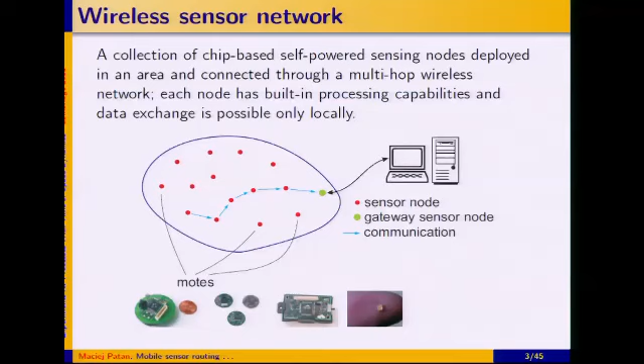According to increasing power of computing systems and developments in networking, and producing low cost, maybe not so powerful, but very low cost electronic devices which are miniaturized, we are able to build extremely complex measurement systems which can provide very rich data, which will be used further in order to produce accurate forecasts of the evolution of the system, or accurate predictions for controlling this system.

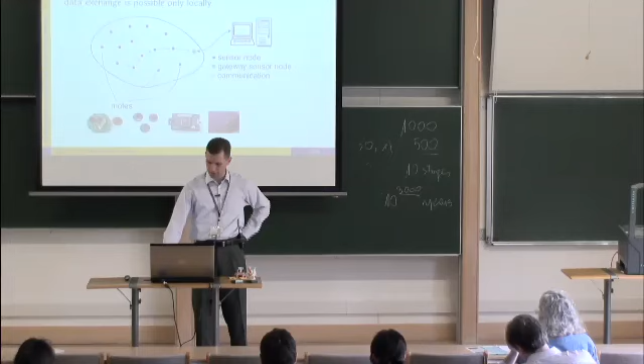Typical operations include sensing, of course, and processing. Every sensor node has a small computational power, so it's able to process the data at least to some extent. Of course, one of the main operations is exchanging data with other sensor nodes, so we have to include the radio subsystem in every sensor node.

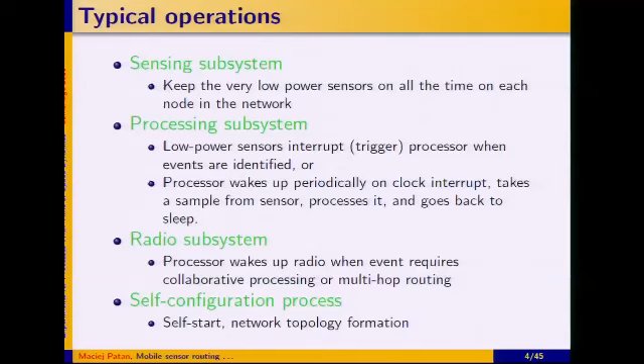Surprisingly, receiving the data and sending the data costs almost the same amount of energy. So from this point of view, usually sensor nodes are sleeping almost all the time and are just doing very scarce measurements. So when we have a swarm of numerous sensors, from the individual point of view, probably the most important thing we have to remember is to spare the energy, because every sensor is usually supplied by a limited battery.

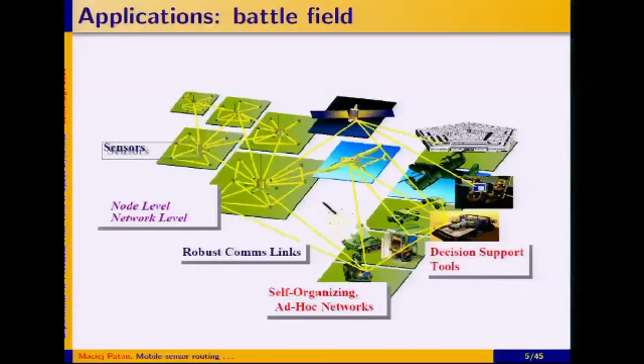Okay, so I'll show you a few applications which are stemming from real-world problems. I'm not trying to show you the same pictures, because these are just examples, but I want to express that these are real-world systems. It's not science fiction. Probably the military applications are very spectacular, but what we are really interested in is

Of course, the main reason for the existence of such an observational system is to control the level of air pollution, because in big cities it's really a big problem nowadays. So in London, in Berlin, rich cities can afford such observational systems, because such monitoring stations are quite complex and expensive devices, and the real challenge is how to utilize this efficiently in order to produce good predictions of the development of the smog, for example. As you observe every day the weather forecasts, you can imagine it's a really difficult and challenging problem.

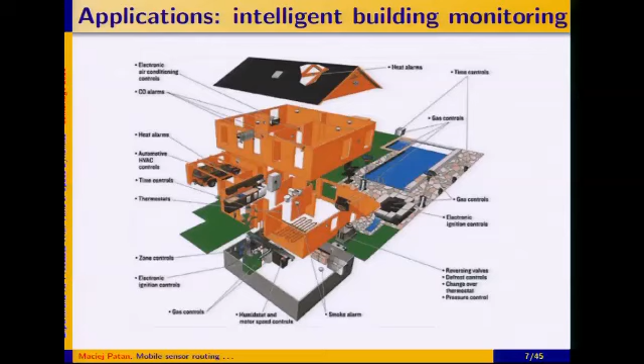Another representative example of application of sensor networks is intelligent building monitoring, in order to spare some energy controlling the evolution of the temperature, for example, and many other things along the building. An extension of this is mobile warehouses, so there is great potential for sensor networks within this area.

If the sensor nodes are conveyed, for example, by autonomous robotic vehicles, often called unmanned ground vehicles or unmanned aerial vehicles, we can say that the sensors have some level of mobility, and are usually called mobile sensors.

I was attending the Decision and Control Conference in Atlanta in December, and the concept of sensor networks has some strange extensions, because there were military applications where a soldier had chemical sensors attached to his uniform, and he was called just a mobile sensor. So it doesn't necessarily have to be robots or autonomous robotic devices.

We can go further, using your mobile phone, which has a lot of sensors included, and you are already within the network. So all of this can be considered as an extension of mobile sensors. It's a pretty funny story, but okay.

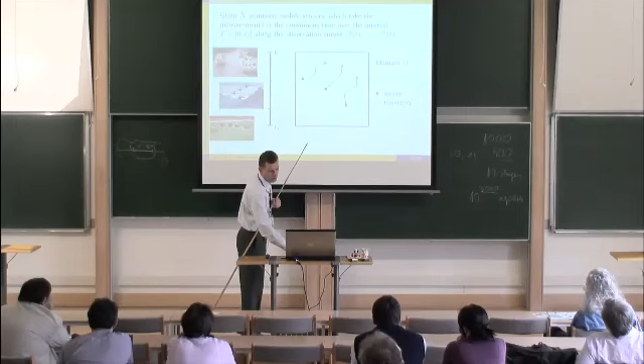What can you obtain with such mobility? We believe that sensors having the ability to move to some areas along the time interval can follow the temporal development of the physical phenomena. So we can go to the areas where something interesting is going on. It's quite intuitive that the sensor should move to areas where, at a given time instant, the measurements will be most informative and provide good data which can be used further for identification of the system, forecasting the phenomena, and so on.

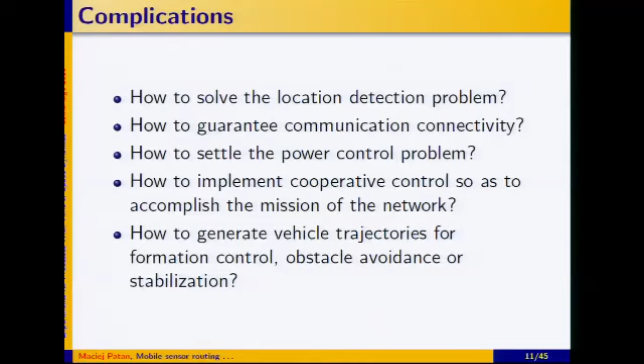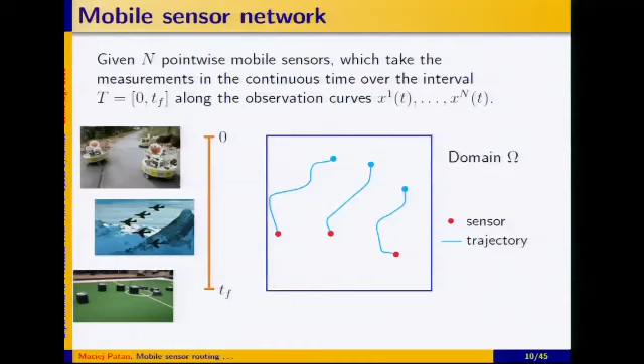It's for sure that mobility requires or introduces great complexity to the problem, so there are a lot of questions which immediately appear. However, we can expect at least that using mobile sensors we can decrease this complexity by using, for example, fewer sensors than in the stationary case. Probably the same effects, the same informative data, can be obtained using just a few mobile sensors instead of 100 or a few hundred stationary sensors. That's why we go for this challenge and look for more systematic approaches related to such moving sensor strategies.

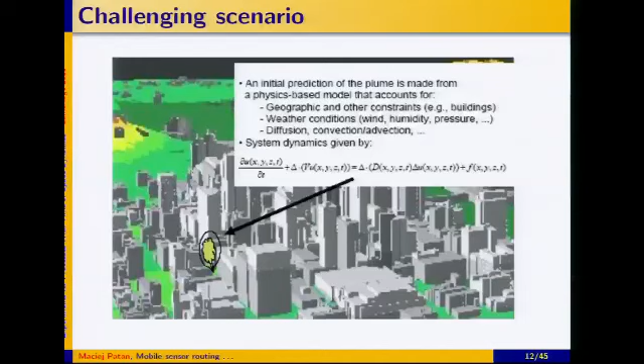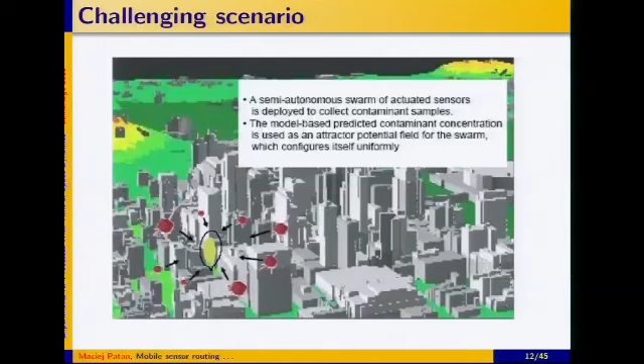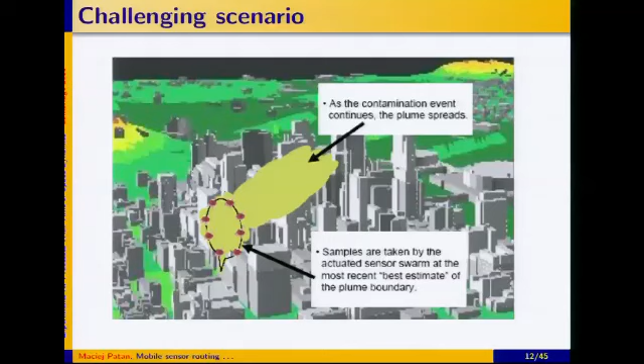A very challenging scenario is the scenario of a chemical attack within an urban area. We start with some activation of a pollution source which develops within time. We try to model this, usually using partial differential equations, for modeling the development of the plume. We deploy a swarm of mobile sensors which have the purpose of monitoring and tracking the pollution boundary. So when the plume develops over time, we try to propose the trajectory of movement for the sensors in order to properly track the contamination area.

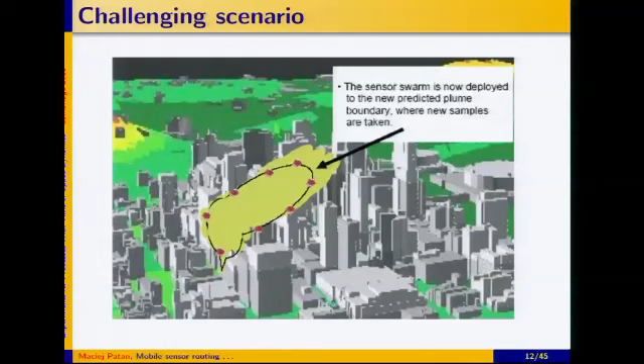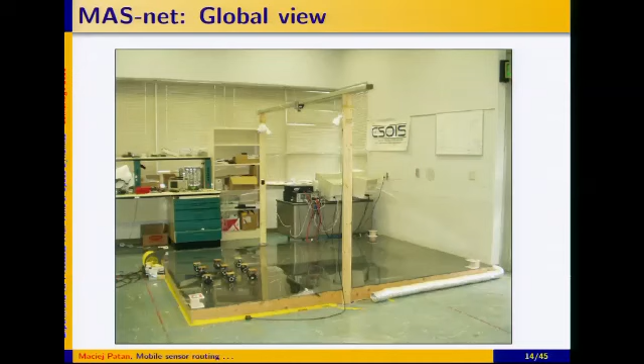To give you a taste of how to test such scenarios in the laboratory, let me introduce a project of our joint co-worker, Professor YangQuan Chen from Utah State University, Logan, Utah. This is a student project. We have a glass cage with walls inside, so we have some kind of labyrinth of rooms. There is a fog machine attached to the cage glass, and we can introduce the fog into the labyrinth of rooms. What we have here is a swarm of 10 mobile robots.

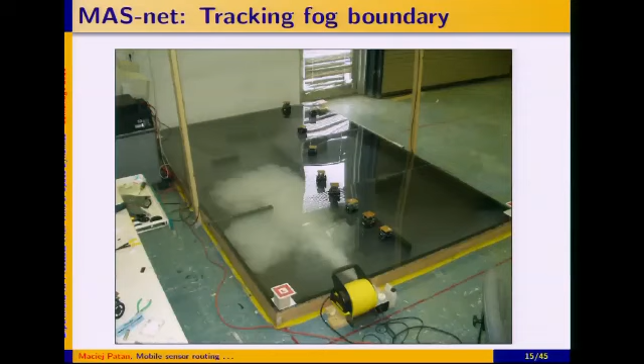Very simple construction. However, they have infrared sensors in order to avoid collisions with the walls, and optical sensors in order to track the boundary of the cloud. Surprisingly, such a simple test bed, because of the micro scale, is even more difficult than the real world case, because we have to model the development of the plume using nonlinear partial differential equations similar to the Navier-Stokes fluid dynamics equation. So it's not easy to approximate the phenomena at such a small scale.

What makes the solution really hard is, for sure, the complex mathematical models which have to be applied. Usually the process is described using partial differential equations, and I have to express that it's not by our choice, because we are not really looking for complexity. Being an engineer, I'm always looking for a simple model which can approximate the real phenomena with good accuracy. But believe me, in many industrial applications, only partial differential equations give you the level of accuracy needed to control the process. That's why we have to go for such complex, sophisticated mathematical models.

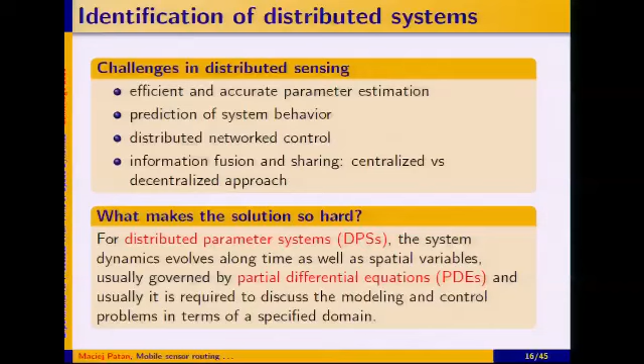But we obtain, potentially, the ability to approximate the real phenomena with very good accuracy.

So I'm going back to the pollution source identification problem, which will be the example we are interested in. The problem, of course, consists in designing the trajectories of sensor movements in order to provide the most informative data for the purpose of, for example, quick and reliable detection of the presence of such a pollution source or sources. And of course, after detecting the source, we have to localize it accurately, and so on.

Quickly, we can go for an even more challenging problem. If the source is also moving and its trajectory is unknown, the question is how to reconstruct such a trajectory. It's probably easy to see that this second problem is far more extremely difficult than the first.

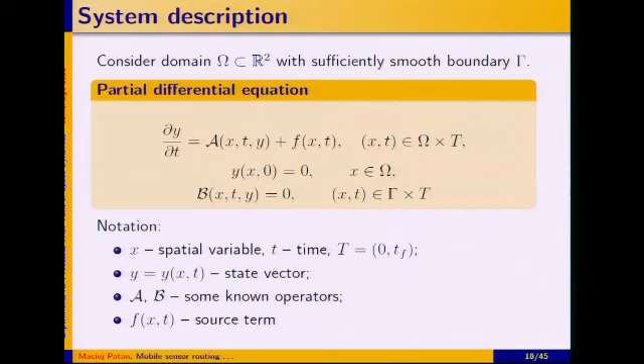Okay, Dariusz has already presented the general description of the class of considered systems using sets of partial differential equations, supplemented with some suitable initial and boundary conditions.

The difference, the slightly different form of the presented model is that there is a directly written term which is responsible in this case for the modeling of the pollution source.

In the literature, different models are considered. However, due to some numerical reasons and due to the flexibility of the modeling, here we have the model, which is a continuous approximation of the pointwise pollution source, most commonly used in modeling in the literature.

So in such continuous approximation of the pointwise source, we have separate terms responsible for the intensity, dependent on the set of parameters rho, and spatial distribution of the source, dependent on the set of parameters b.

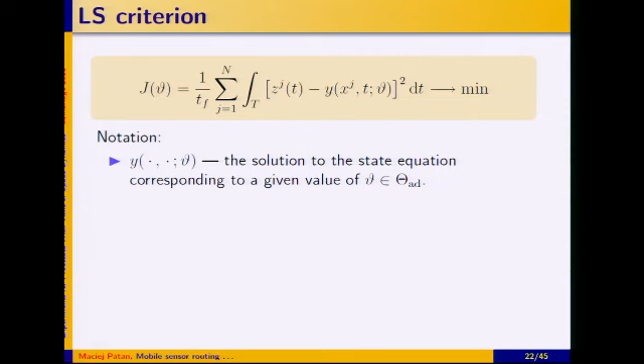A typical approach is to use the least squares criterion in order to estimate the vector of parameters theta, the vector of system parameters.

Very roughly, we can start with the formulation of our problem in terms of how to determine the trajectories for the sensor nodes so as to maximize the estimation accuracy.

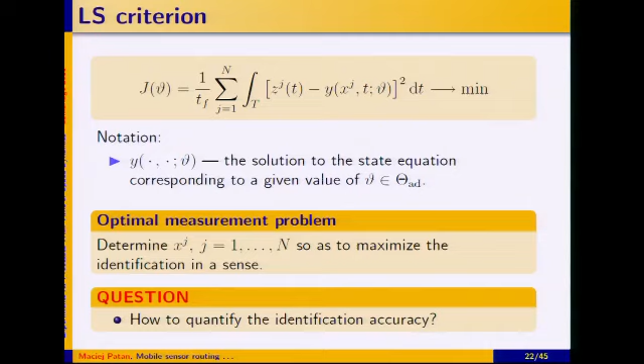A reasonable approach within the mainstream of methods originating from experimental design theory is to use as such a measure the Fisher information matrix. It has almost the same form from the notational point of view—there is no crucial difference compared to the Fisher information matrix presented by Dariusz in the previous talk.

However, here, instead of sensor position, we have the whole trajectory of the sensor node.

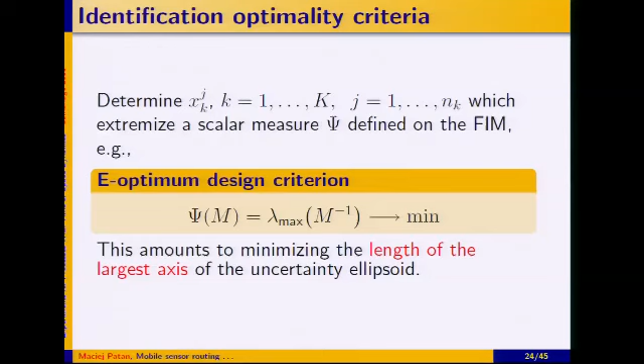As usual, this is familiar for almost all of you, that we have different strategies of compressing, so as to achieve the proper accuracy. I will skip this in order to spare some time.

When we're talking about robotic vehicles equipped with sensors, it's clear that we have to impose some additional constraints, because there are no robots which have enough power to go with any velocity in any direction. So there are natural constraints which have to be imposed on our problem.

So we have to model the dynamics of sensor movements. Here we have the vector of temporal sensor positions. Introducing such a vector, we can write down an ordinary system of differential equations describing the dependence of the positions of the sensors on some control.

Usually, in the simplest case, we can consider this as, for example, velocities of the robots.

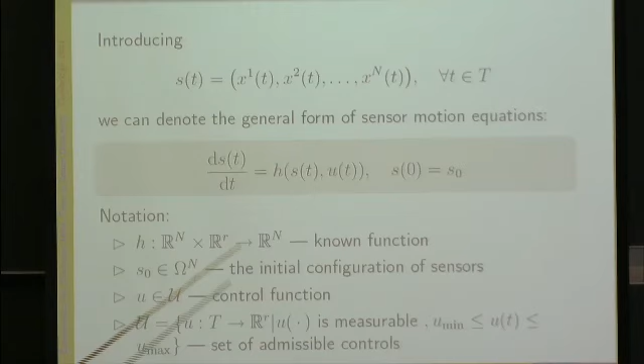Such constraints provide, of course, some level of regularization for the sensor trajectories, because, due to the numerics, we have to assume that the right-hand side is a function differentiable with respect to time, and this introduces some level of regularization for trajectories. So from this point of view, they will not only be measurable, but, for example, continuous.

More formally, we can now describe the optimal sensor guidance problem as looking for the pair of controls for the robots and initial positions of the robots. We can also, to increase the level of optimality, optimize not only controls but also the initial positions.

It is possible to introduce this easily into the problem in order to minimize some scalar measure operating on the Fisher information matrix. Trying to solve such a problem directly, you can imagine it's quite a difficult task. Fortunately, there exists a simple reformulation of the problem.

So introducing a quantity pi, which is nothing else as a Fisher information matrix with the defined observation horizon, we can reformulate the problem in terms of the equivalent linear Mayer optimal control problem. It is now easier to solve.

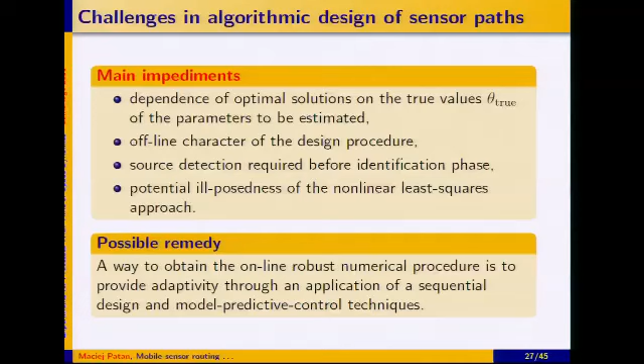A potential solution to overcome those difficulties is to make a combination of well-known techniques known from optimal design theory. For example, naturally we can split the observation interval into sub-intervals and provide a similar procedure to well-known sequential design. So within each interval we will repeat the processes of estimation of the parameters.

And based on those parameters we can design new trajectories within the next time sub-interval.

Another problem related directly to the air pollution is how to reliably detect the source. So when it appears within our system, and how to then localize it with good accuracy.

First, to focus your attention, not all of the parameters of the system can be used in order to, for example, provide a good, proper, accurate detection of the source. So we have to split the vector of system parameters into two parts.

The first part will be composed of the parameters which are useful for building a proper diagnosis, and the rest of the parameters which still have to be estimated but are not significant for our purpose of detection of the source. In such a way, we can formulate the source detection problem.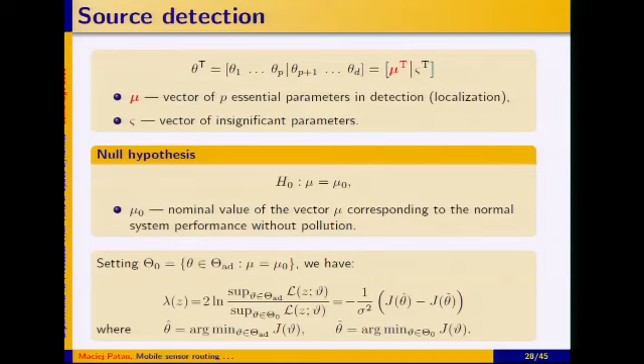So now, even for the problems when we know directly that such a likelihood test is not optimal, we can still utilize this and obtain suboptimal but accurate results.

We also have the very nice theorem by Goodwin and Payne that the log likelihood ratio converges weakly to some variable from the chi-square distribution with p degrees of freedom. This gives us a very simple threshold test.

So in order to detect the source, it is enough to compare the log likelihood test with some significance level taken from the chi-square distribution.

The question is how to maximize the reliability of detection, in terms of the application, how to minimize the probability of missed detection. So where the source is present and we don't want to miss this fact.

The very natural answer, owing to the assumption that the sensor nodes provide independent measurements, it's clear that the more sensor nodes we use, the more reliable data we obtain. But unfortunately, in many practical applications, the number of sensors is limited, so we have to look for some alternative solution.

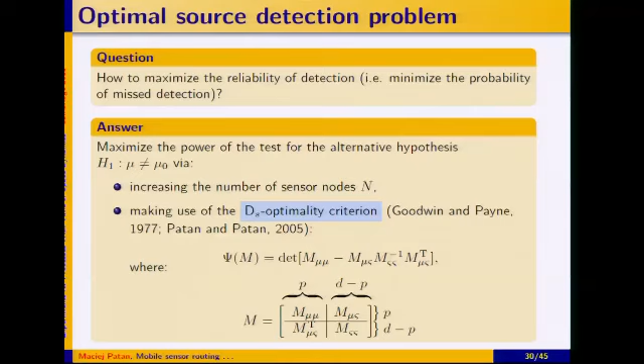So it has been shown that we have to focus on the Schur complement of the Fisher information matrix, related to those parameters which are required for proper detection. And we can use this well-known DS optimality criterion in order to increase the reliability of the diagnosis. And what we've got here is nothing else but the sequential design.

So we split the whole observational interval into many sub-intervals. And for each sub-interval, we alternate the analysis phase, when we try to, based on the current estimate of the parameters, predict the evolution of the system. Then we try to design the trajectories for the next sub-interval. Then we go for the experiment phase, so we collect the data.

And finally, based on the data, we try to use the log likelihood ratio. We want to answer the question if the source is present within our monitored area or not. And then we go to step one and repeat the same procedure for each consecutive time sub-interval. So from the point of view of experimental design, it's nothing else like a sequential design.

The localization block: once the pollutant source is detected, we have to localize it, so we focus on different parameters. The localization block seems almost the same, it's a sequential procedure. However, the difference is that during the localization phase, we focus our attention on different parameters of the system. So in these terms, it's different.

Okay, so I'll go quickly into some numerical examples. Consider identification of the stationary source. So we model the transport chemistry process of the pollutant using advective diffusion equation, supplemented with some boundary and initial conditions.

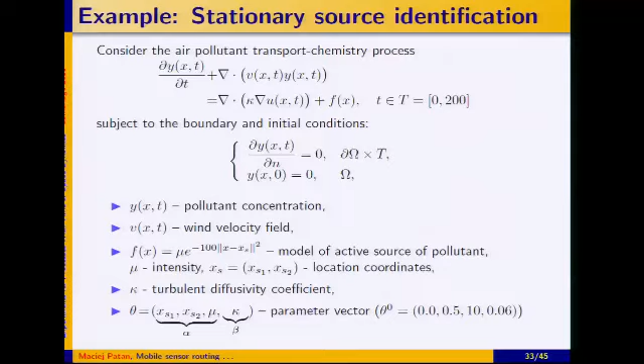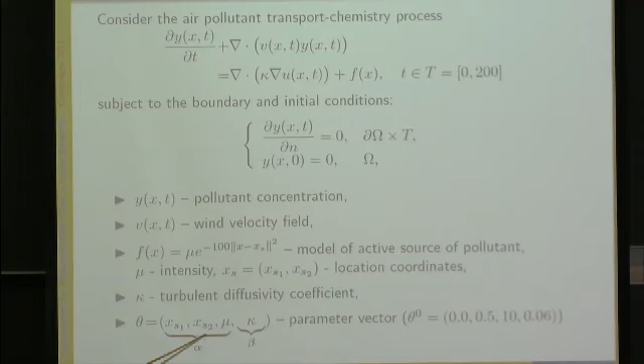Here we use a very simple model, Gaussian, for modeling the active source. What we want to find, because the source is stationary in this case, instead of trajectory, we want to find just a localization: the coordinates of the source location and, of course, the intensity of this source. The parameter which is not interesting from the point of view of source detection is the tensor of turbulent diffusivity. So we want to focus on those three parameters describing the source. Of course, this kappa parameter also has to be estimated, but we are not focusing our main attention on this.

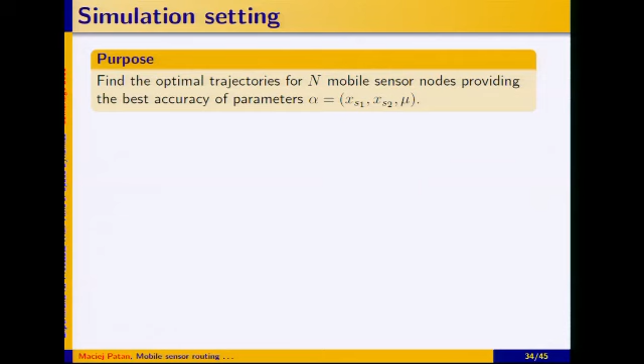So in our simulation setting, the purpose is to design the trajectories; because this is a stationary source, there is no adaptivity at the moment. We want just, in an offline manner, to propose the trajectories for different numbers of sensor nodes, providing the best accuracy of the three parameters describing the source.

For the sake of clarity, a very simple sensor dynamics has been used. We control the velocities, so u is the vector of velocities in two spatial directions. Control constraints: the velocities cannot exceed some maximum speed level.

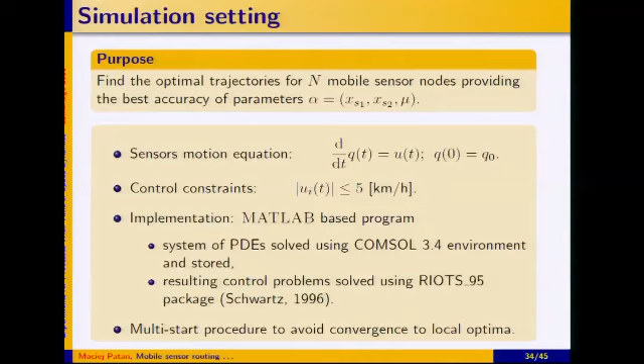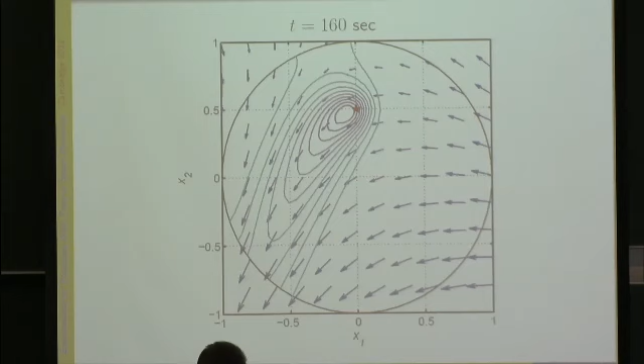So the parameters of the source, its proper location and intensity, are unknown. We have to find how it works, so probably I'll go for the animation. The sensors approach the area from the left boundary, and we can see that after a few hundred seconds, the source is localized in terms that the sensors tend to find the location of the source.

Because of the velocity constraints, the last sensor is not able to reach the area where the source is present. That's why this trajectory is like this. It can be explained in terms that these sensors try to provide information not about the coordinates of the source, but rather on the intensity and the unknown turbulent diffusivity coefficient. We can see the same procedure for 6 sensors.

Trajectories are very similar, owing to the assumption of independent measurements. Probably those 2 sensors in the middle just... So you can have the impression that we can use more and more sensors, and the trajectories will be similar, and just some new sensors will independently follow trajectories which will be more informative in our problem.

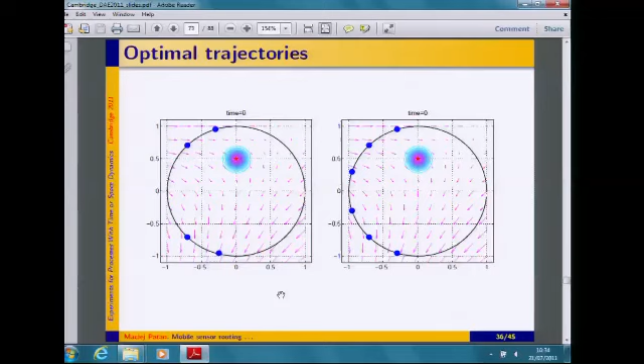However, I have also run experiments with a number of 20 sensors, and there the problem appears that they have to exchange information, so the trajectories differ from the comparison within the 4 and 6 sensor cases. It seems that the differences are very insignificant, but the more sensors we use, the problem becomes more... okay, so I'll go to the next one.

So the last example I will present very briefly. It's more challenging, and here we have the mobile source. The equations look similar.

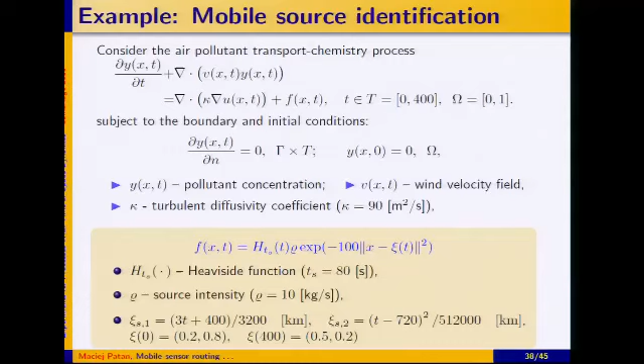This time the source starts emitting the pollutant not at time 0, but at the moment of 80 seconds. The source is moving along a parabolic trajectory, so the process is even more complex than in the previous case. Now we are using only 4 mobile sensors.

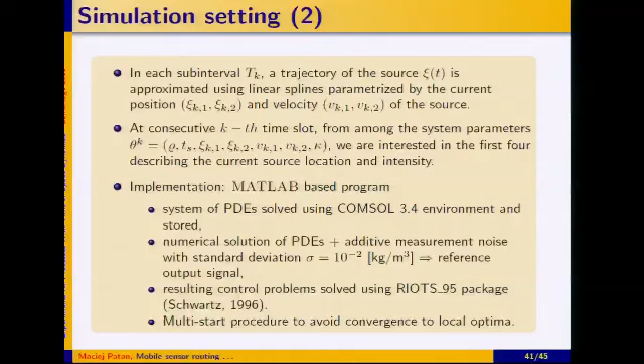Okay, here are the results. At the beginning, the sensors follow some arbitrary trajectories, just going toward the center. When the source appears, some of the sensors which are able to follow it do so, but the last sensor is not able to reach on time.

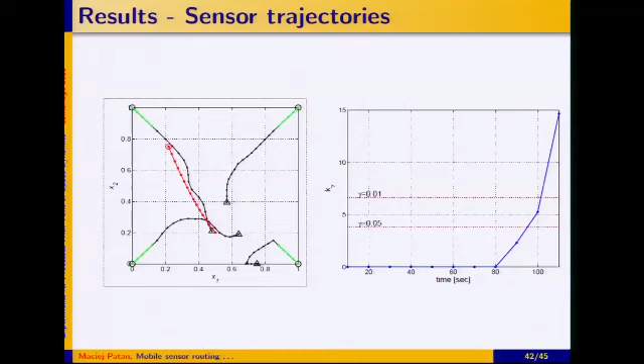So how to explain the behavior of this last one? It's difficult, but what's used here was the linear approximation. The parabolic trajectory was assumed to be approximated with linear splines, so in designing for the next consecutive time subinterval, we do linear interpolation.

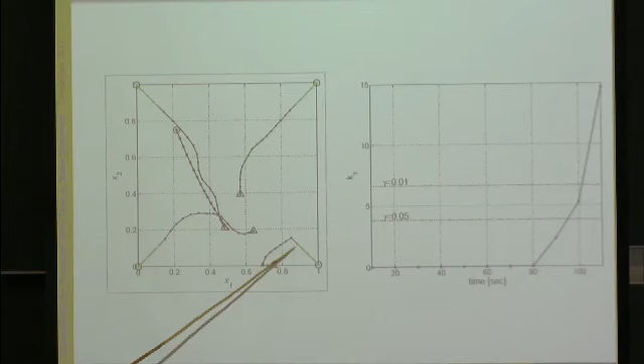So you can say that this last sensor is just looking for the prediction, not the real state of the system. The trajectory design is based on the prediction, and the linear predictions force it to look in an area where there is nothing interesting.

Here is the real trajectory of the source and the reconstructed one based on the data gathered within this experiment. Assuming that there's a lot of approximation, linearization of the trajectory, and simplification within this example, I can say that this reconstruction is pretty nice. I'm quite delighted with such a good result.

And quickly, standard deviations of the parameters estimated during the consecutive sub-intervals of time are decreasing, so we improve the quality of the estimates along our time axis. Okay, so probably I will finish at this moment. Sorry for extending my speech a little bit.

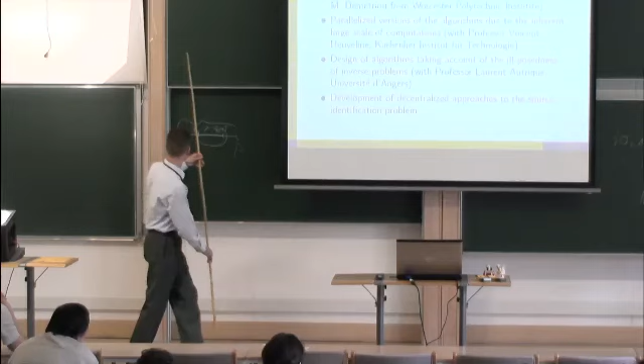May I have one comment and one question. Beautiful presentation, but you don't necessarily need to name these sensors robots. Robots are very expensive and people don't like them. If you use moving sensors on a car or flying, let's say, an airplane, it's exactly the same. In fact, this robotics terminology is not necessary.

But my question is about detecting sources of pollution. The time that you detect depends on initial sensor positions. Have you tried only starting from given points, or just moving at random like Brownian motion?

Yeah, so the question is why I chose the initial positions. There is no a priori information about what is going on in the system, so the arbitrary choice was to choose those corners, but those initial positions can be optimized as well. It was done only for the purpose of simplicity of simulation. That's all, but you are right.